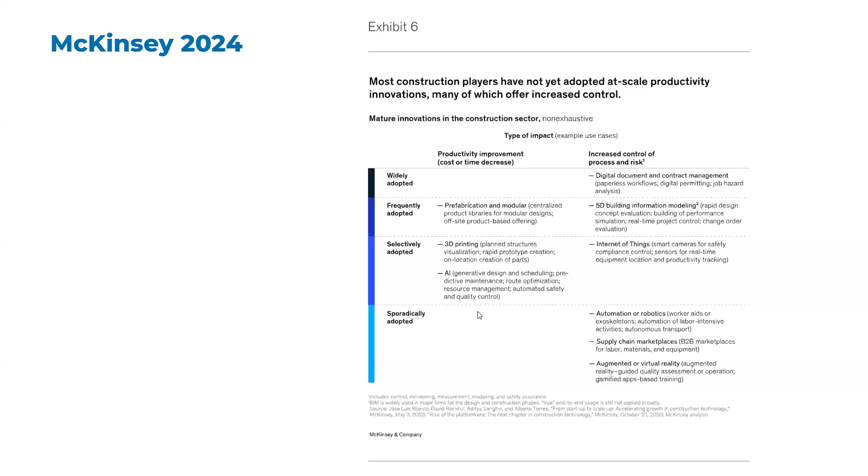And if we look at the current trajectory, construction output might fall short of demand by 40 trillion by 2040, according to the McKinsey 2024 report. These are the numbers. So we are all facing a great challenge: we must improve the way we work.

And if we're talking about labor productivity, construction continues to lag behind productivity in manufacturing and the total economy. So if we look at the 2017 metrics and graphs, we're still really behind. So we have manufacturing, we have total economy, and construction is still lagging behind.

And when I started this research, probably around 2019, so over 5 years ago, what I read about mostly at the beginning was modular construction. And I'm sure a lot of you are familiar with that. The team and myself were surprised that modular construction was not widely adopted and very popular. You can see in the picture a building by SHoP Architects in New York City, in Brooklyn. That's considered the tallest modular building.

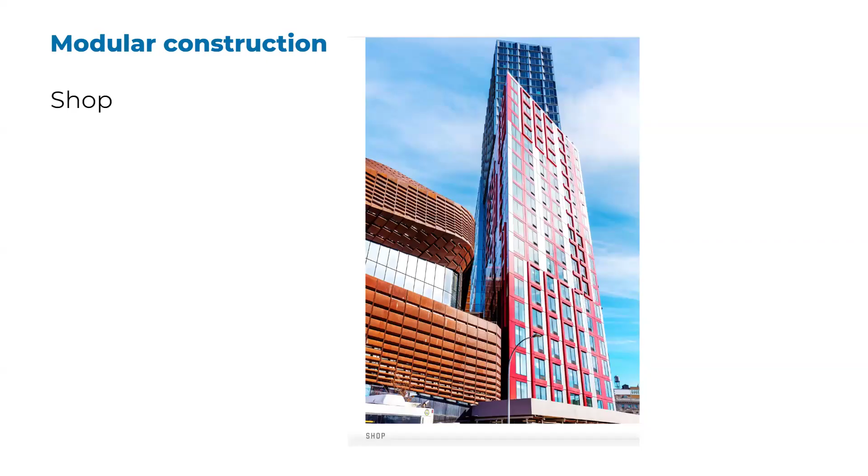And researching more deeply why it wasn't adopted back then in 2017, 2018, we found out that it's a great concept. It's a beautiful concept that you actually build everything, the units, if we're talking about multi-family projects or other types of buildings, everything is planned and built in the plant, and then brought ready-made to the construction site.

And the two reasons we believe it wasn't adopted all over the industry: first, the efficiency of urban buildings. Because these units are structurally self-sustained, the walls and the floors need to be structurally sustained, and therefore they're much thicker than regular buildings. So we lose a lot, it can be shorter floors or shorter buildings and smaller areas, and we lose a lot of air rights and spaces in the building.

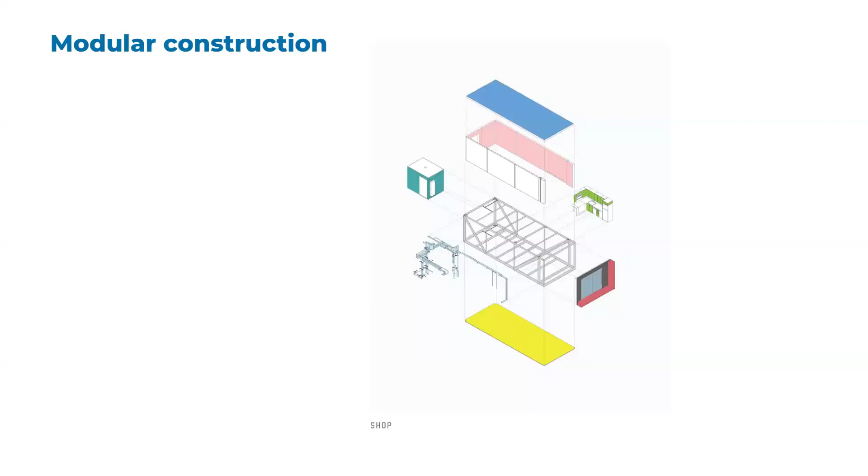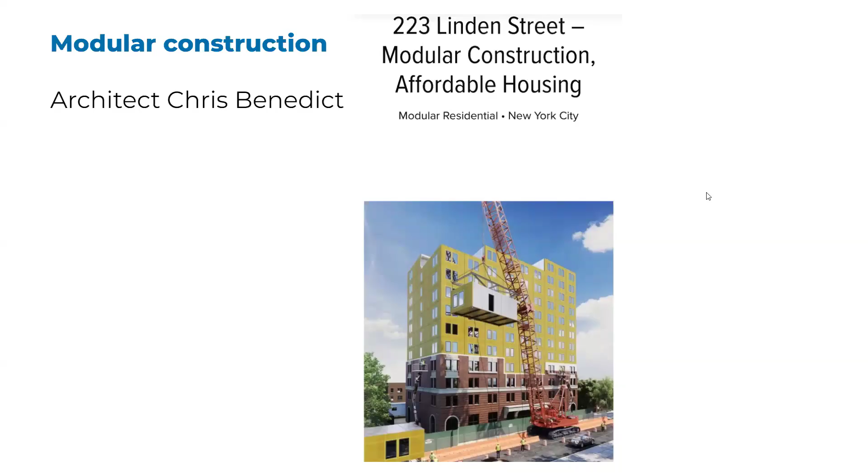The other reason we found out was that those buildings were not structurally well built. That was a major problem, since the safety of the occupants and the safety of the public was not maximized. That's another building, an affordable senior housing project in New York City on Linden Street in Brooklyn that was built with modular construction. And again, we found the same problems in the process of this building.

I'd also like to invite you to join me at the beginning of my career. I started my career at Florence University in Italy, and studying there involves a lot of Renaissance study. All my research as a student was about Renaissance masters and Renaissance architecture. One of the dissertations I focused on was Leon Battista Alberti and his theories of harmonic music. Renaissance men were not like today, where we're architects designing buildings or doing other trades that we specialize in.

Renaissance men were multidisciplinary people. They were architects, artists, historians, researchers, mathematicians. They really included all of these disciplines. For me, that's what enabled the creativity and the transformation of that era. A lot of the things happening today remind me of the Renaissance. So I'm going to go back and forth between my own past and our history of modern architecture, to see how we can learn from it for today's transformation of the industry.

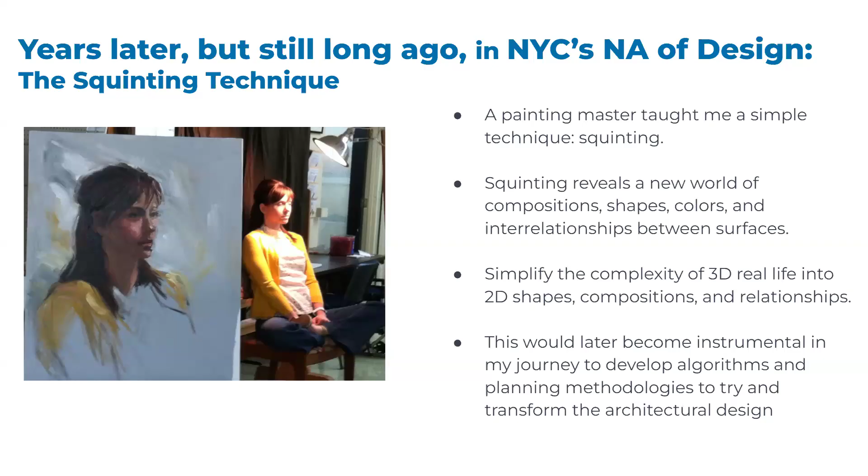And this technique of squinting would later become instrumental in my journey to develop algorithms and planning methodologies and try to transform the planning process. As you all know, the process of initial design of buildings is so complex, a complex constraint optimization problem, if we can define that problem. It's so multidimensional. We have the regulatory ordinances: we have building code, we have zoning, we have fire code, and we have ADA.

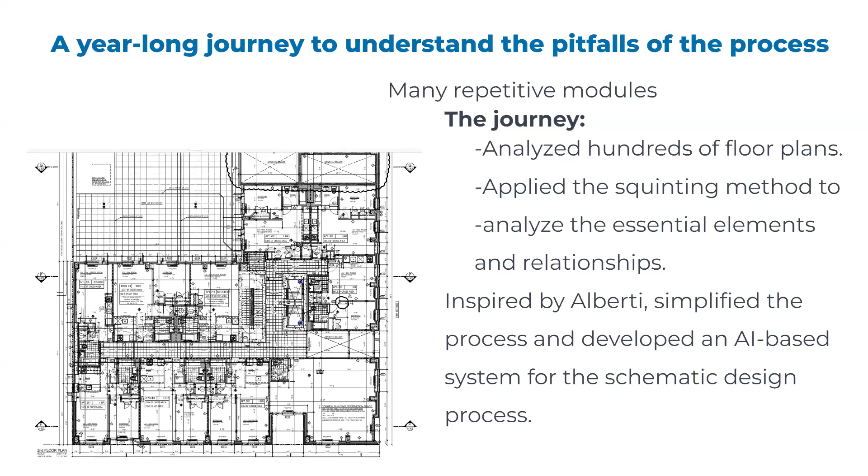So, Dity, we have a first question. They want to know, was the golden mean used by the Greeks included in the mathematical findings? That's not what Alberti's research did, but it's exactly the same principle, right? Because it's also translating visuals into regularities of numbers. So it's not what Alberti was talking about, but of course he was influenced. It's a similar idea. Are there any other questions? No, that's all the questions right now.

Okay, thank you. So going now to 2024, in the time tunnel to 2024, I think all of you heard of the Nobel Prize for Hopfield and Hinton for their discovery.

So this is the physics Nobel Prize, but they got it because they are the ones who actually started the foundation for the current AI transformation, because they studied the human brain and how the neurons in the human brain are connected and working, and their theories and research about that created today's most common AI that we see spreading like fire everywhere. And it actually started with these two. So they just got the prize now.

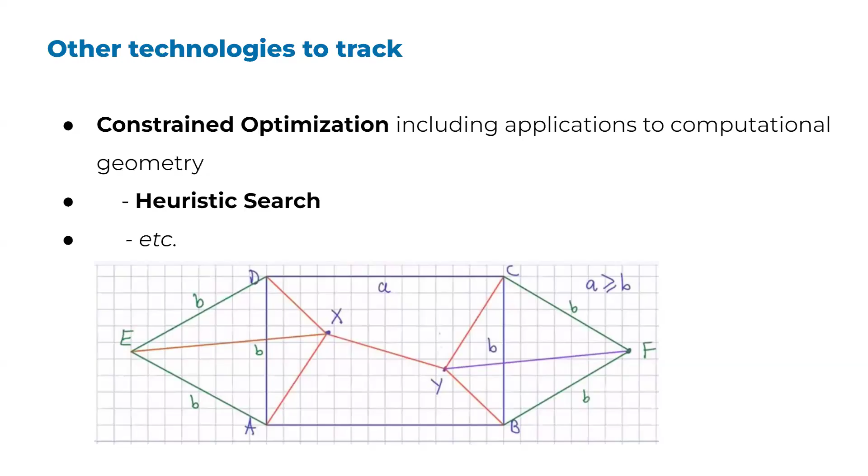And if we're talking about heuristic search, when we started to work, I had a meeting with two engineers, and they saw that our system automatically designed a building plan, and they were like, "How did you do that?" And one of the engineers, an older engineer, all of a sudden said, "I know." And he explained to his colleague, "If, and then, if, and then." So if, and then, like a decision tree that will create designs. At every step you can answer a question, and based on that, create your design.

So these open endless opportunities beyond schematic design or very conceptual planning. For example, code parsing, natural language systems analyzing complex building codes, zoning books, regulatory texts, and extracting the relevant information and constraints as input for the system. So that's not science fiction. We're already there.

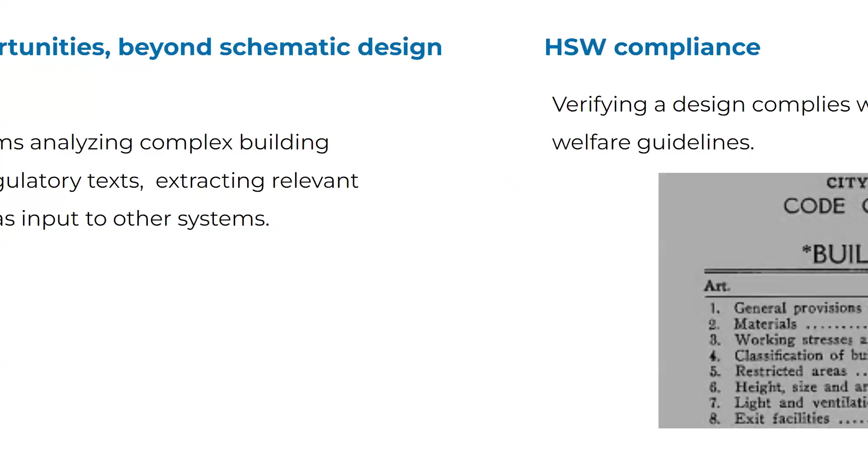So imagine that we teach a system what components like staircases, egress, and dwelling units are, and teach it all the if and then for every step of the design process, together with analyzing huge amounts of texts like building code and zoning, and how the system can come up with a design. If we talk about health, safety, and welfare compliance, verifying a design complies with those guidelines, it's the building code, and starting to teach those LLMs books like the building code.

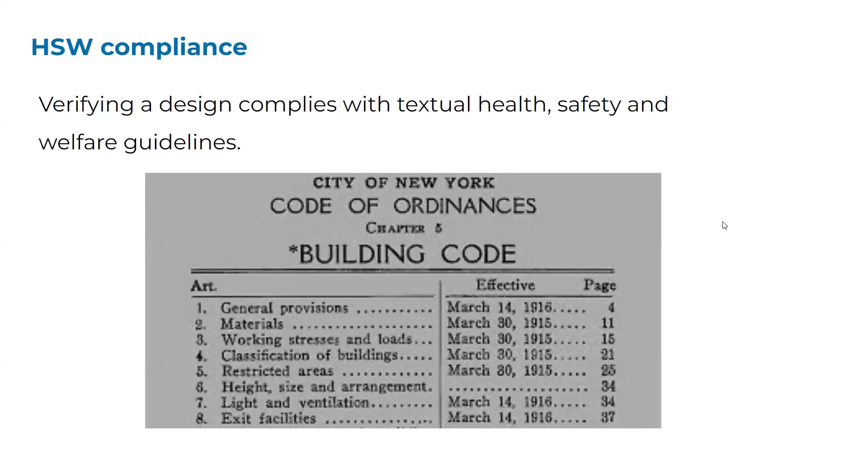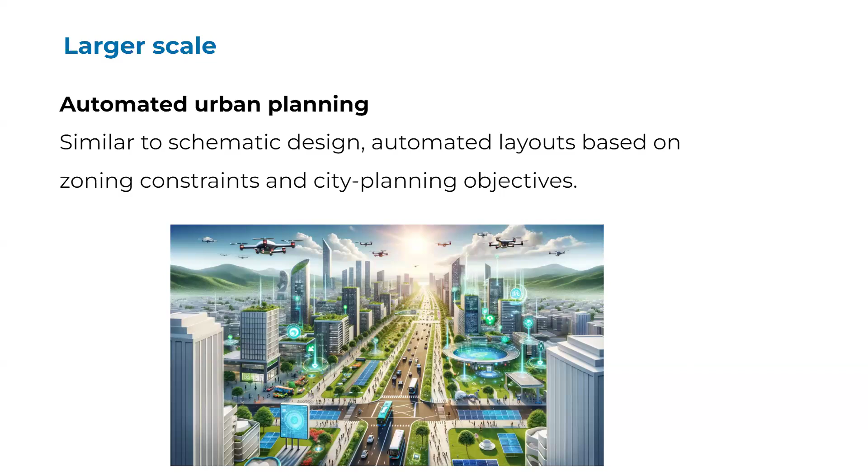And of course, you can take it on a small scale of a dwelling unit, or a small house, a building, a larger complex, and cities, if you're taking it to urban planning and large areas to plan. And ArcGPT, like chat interfaces for architects and for architecture. The sky is the limit for the possibilities in that.

Just to make it a bit more interesting, think about chess, the Leela and Stockfish chess games. Leela Chess Zero is only a neural network, the classical AI of the neural network that we spoke about. While Stockfish is rule-based, the if and then technology I described, but with huge computing power. And they're competing, and they built into Stockfish a layer of neural network on top of the classical algorithm. It's just an interesting analogy, but I think there are a lot of similarities between chess and architecture planning if we talk about technology.

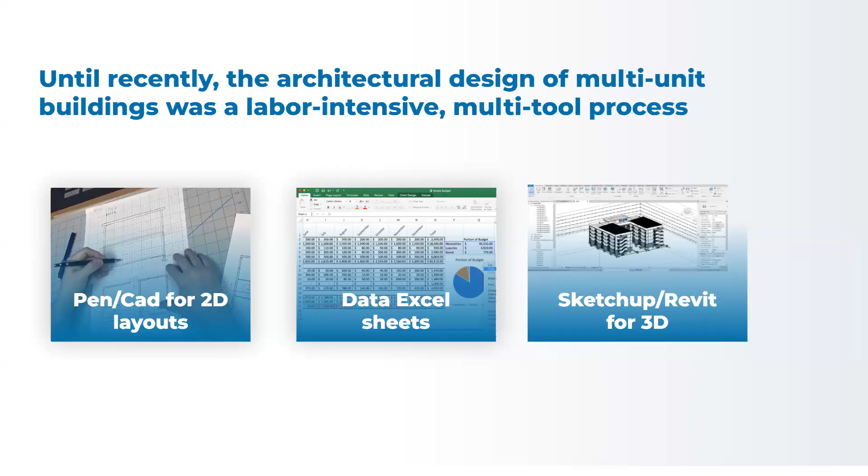So until recently, and even today, the architectural design of multi-unit buildings, meaning multi-family, mixed-use buildings, offices that have repetitive cells, hospitals, schools, and larger urban complexes, the way we plan is not very efficient. A lot of architects are still using pen and paper and CAD for the 2D, and then going to Excel sheets for the numbers. That takes a long time in the planning process of a project. And with SketchUp and Revit, you can have some 3D, but it's spread over a lot of different abilities.

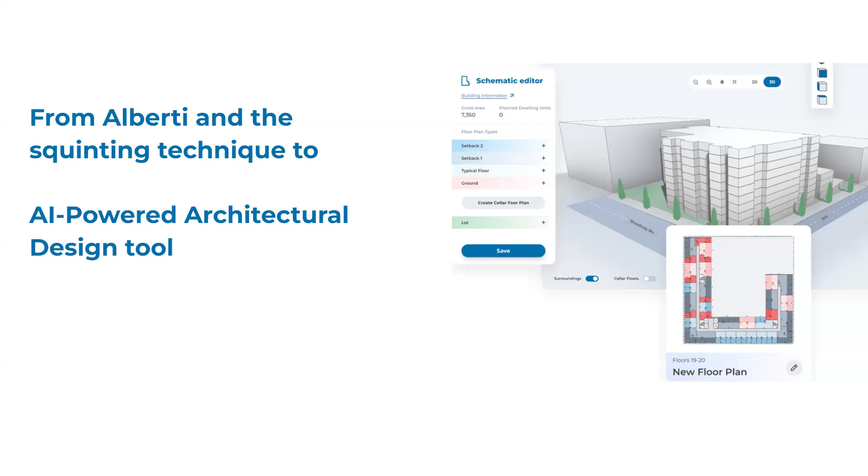All of the things that I described really helped us understand and dive better into AI-powered architectural design tools. And when we started, we were very concerned: will architects resist the intrusion of AI? So I was very happy to hear when Stacy started that there was demand to learn about AI. I'm not going to teach you about any specific tool, there are so many tools out there now. I think it's very important to strategically understand the ways to think about it and start to use it for any task you would like to improve in your process.

Surprisingly, we thought that architects would hate it and be very defensive, fearful for their jobs. But when we started to launch the product and talk to fellow architects, we slowly started to understand that architects are embracing it. The architecture process is so complex, so long, so many hours, with a lot of tasks within those hours that could be automated.

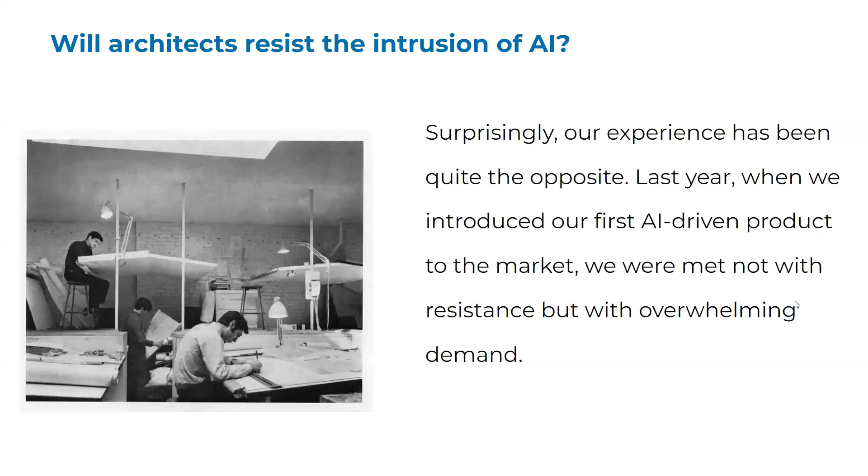So surprisingly, we met the opposite. We met real embracement from almost all of the architects we spoke to, embracing the opportunity to delegate repetitive and tedious tasks to AI systems, freeing time and energy for more creative work, and striving to make our small margin business, because architecture is a very small margin business, more profitable. That's very important.

Okay, I have a couple questions. Sure. Okay, as it relates to architectural design and AI, how does the if-then scenario play out when there are gray areas of the code or areas subject to multiple interpretations that need to be vetted, discussed, and confirmed with the agency having jurisdiction? That is a great question.

So in New York City, where I used to work, I don't have to tell you how complex the zoning is, and many times one section contradicts the other in the zoning resolution. So I totally understand the question, and I have some real life examples for it. But I think the one thing that AI can help with, when they work on large language models, is understanding those conflicts and making architects and planners aware of those conflicts. I don't think AI will solve them.

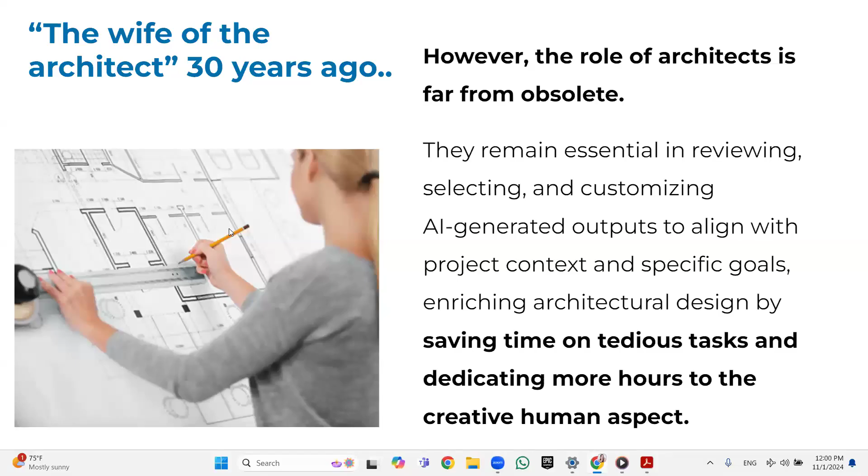And one time I asked her, Giulia, what does your mom do? What's your mom's profession? And I'm reminding you, it was 30 years ago. And Giulia responded, my mom is the wife of the architect. So the wife of the architect 30 years ago, does anyone have an idea what it was? Just in the chat, Stacy, if someone can guess. Okay, I see no guesses.

So 30 years ago, when I was in university, AutoCAD was not widespread. We didn't use AutoCAD. We used pens, and we drew with a special pen, and so Giulia replied to me, my mom is the wife of the architect. And when I was naive, like you, I didn't know what it was. I see people are starting to answer. So is there an answer, Stacy? Just a second here.

Yeah, there's assistant architects, tracers, draftsmen, drafter. Yeah, great. That's correct. So I didn't know what the wife of the architect was, I'm not coming from an architect family. And then Giulia explained to me that because we were drawing with pens, the wives of the architects were the masters of drawing these millions of dots to draw grass and millions of lines to draw the leaves of trees on floor plans and construction plans. And they were the ones that drew the million lines to make the stone facade on drawings, because it was all manual.

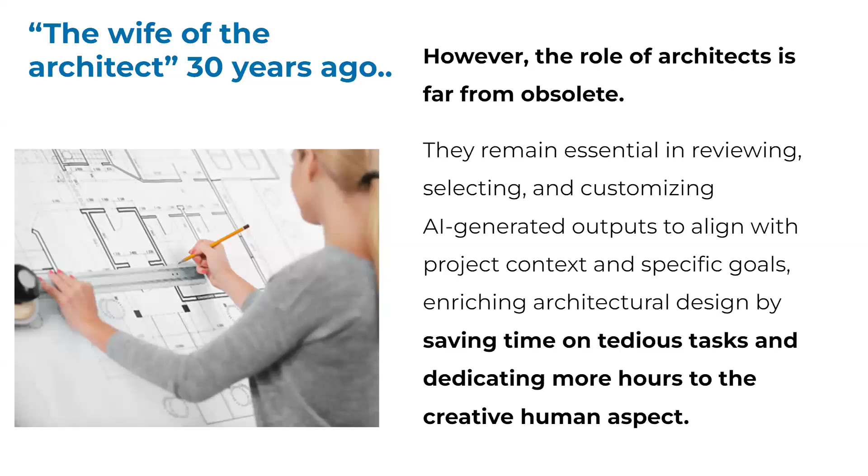So if we're talking about the role of architects, architects are still going to design the buildings and are still going to manage that process, but we'll need to change the skills. We remain essential in reviewing, in selecting, in customizing AI-generated outputs to align with project context and specific goals. But a lot of things are going to change. So that's actually the transformation.

We already see a lot of tasks being changed. AI tools like ChatGPT and generative design platforms are transforming a lot of the flows already. And we leverage AI for a lot of our administration. And like I said, I'm hoping it will boost creativity and productivity by handling the routine, boring, tedious processes. I was talking about the initial design stage, but it can predict materials, it can update BIM, assess clashes in the design of the system, and manage drafting and scheduling.

But while offering new opportunities, AI also raises questions about automation in architecture. And so, like I said, there's a lot of advantages. It's instant. We can do stuff up to code once it improves, and optimize multiple options. It takes us forever to design one option, but a system can do millions of options on the spot. And the workflow can also be connected to other means.

But we also have to talk about other aspects. Now, I spoke about Fariba before. This is a project that Fariba created in New York City, and all the use cases I'm going to show you are from New York. She's, in 2022, the 7th largest in New York. She's the owner of Fischer Makooi Architects. And if you look at her floor plans, you can see issues like egress distances. You can see stairs. You can see clearances. You can see dwelling units, that all of the dwelling units have access to legal light and air.

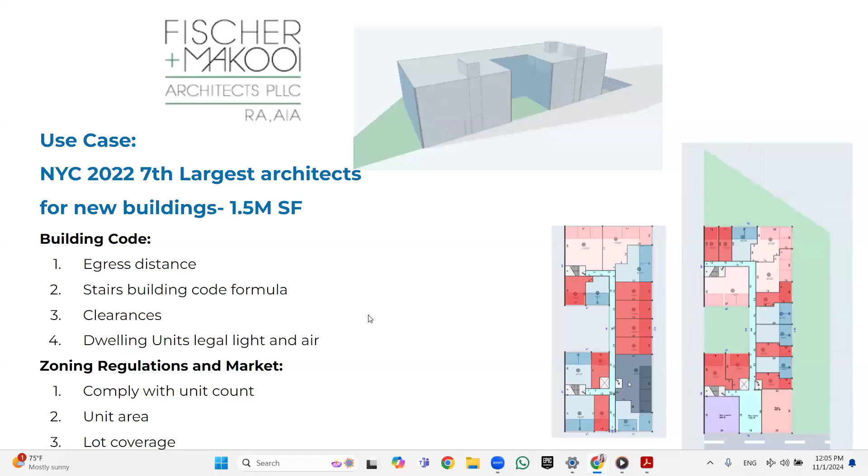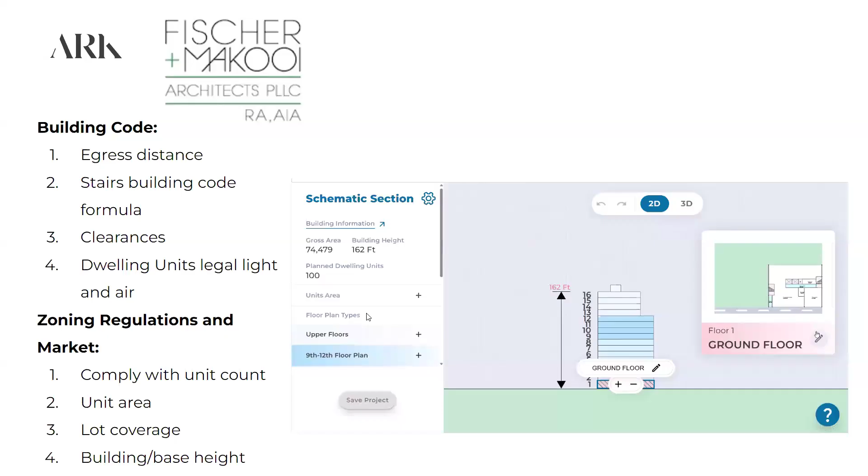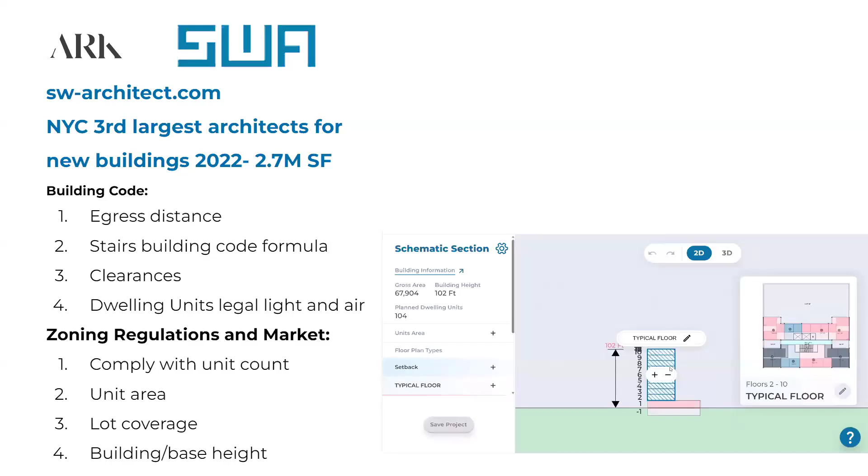In this floor plan. And if we're talking about zoning, compliance with unit counts, with unit area, with lot coverage, with base height, with so many aspects of building code and zoning. And so this is a project by Sam Weider Architects. He's the 3rd largest in New York City for 2022. And this is also a project that was created with AI. And again, building code, egress, stairs, clearances, zoning, comply with unit count, unit area, lot coverage, building and setbacks, and all those issues.

And so enhancing architectural design through AI, prioritizing health, safety, and welfare. So I showed you the examples that are real projects that were designed with AI, and we're hoping that it will increase or enhance the occupant well-being, the public well-being, streamline design for better health, safety, and welfare, and redefine traditional approaches to prioritize these outcomes. And it's not only about time and labor saving, it's also about better space utilization, because computers are better than humans in optimization. So I spoke before about mathematics and optimization problems like design of urban buildings, and computers have much better capabilities than us for optimization.

And if we talk about space efficiencies, it's critical for us. Housing is a basic human need, and rapid urbanization is happening. We need to build 96,000 new homes every day to house the estimated 3 billion people who will need adequate housing by 2030, which is almost now. Now, by 2025, 1.6 billion people are expected to be affected by the global housing shortage. And there's a lot of talk about the housing crisis in the US right now. The United States alone is short of 1.5 million homes today. And demand and efforts to develop sustainable, inclusive, and affordable housing solutions to cater to diverse needs of communities across the world.

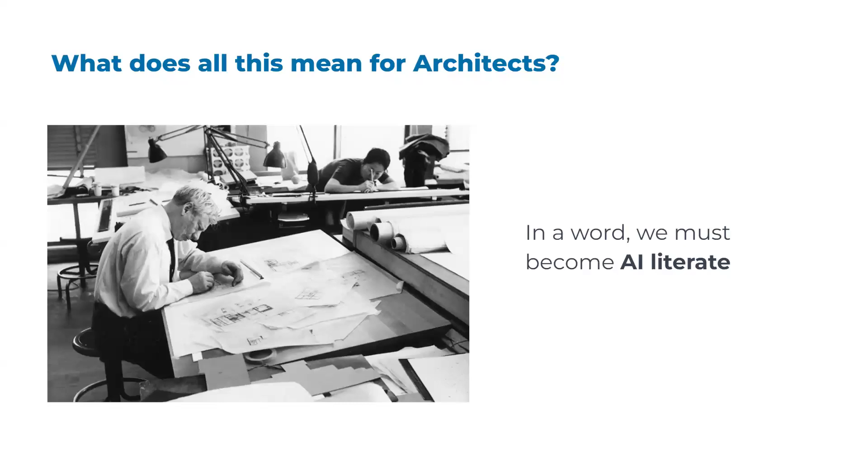In a word, we must become AI literate. Navigating complex building code regulations, for example, egress compliance. That's just one example I'll talk about because it's very easy to demonstrate in floor plans. It's a process where we have to make sure that all the exits comply with the egress requirements. For a machine, it's doable. It's very easy for a machine to learn those regulations and either speed a design that is complying or look at your design and help you make sure it's complying.

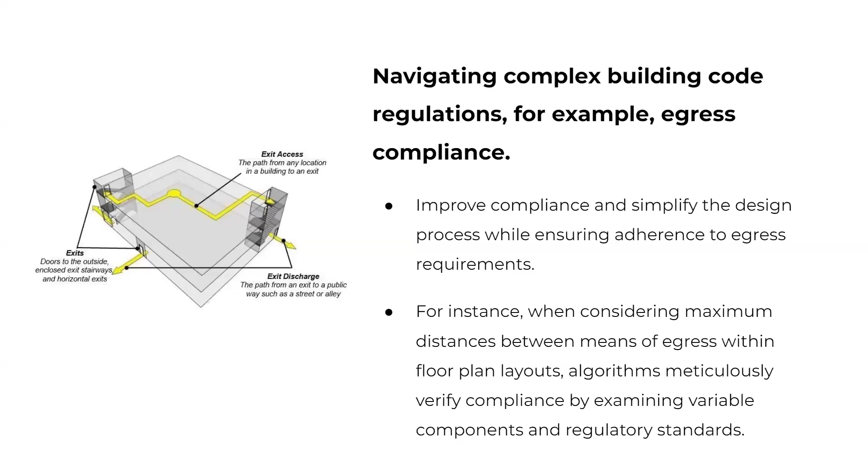So when we're considering maximum distances between means of egress in floor plan layouts, that's easy for algorithms to verify compliance for your plans. For example, safety during emergencies in egress, you can check that. And algorithms, as we had the question before, Stacey, adapt to diverse jurisdictional standards. I'll give you examples that I saw.

In New York City, the maximum allowed dead-end corridor, I can show you on plans later, is 80 feet. In California, I was told it's 50 feet. So that's something that is very easy for a system to learn, detect, and help you understand if your very complex design is complying.

Now, AI can play a crucial role in optimizing staircases. For example, the formula of tread and riser, the railing, the path, clearances, all that is easy for AI to speed a design that is complying or to verify that your floor plan is actually in compliance.

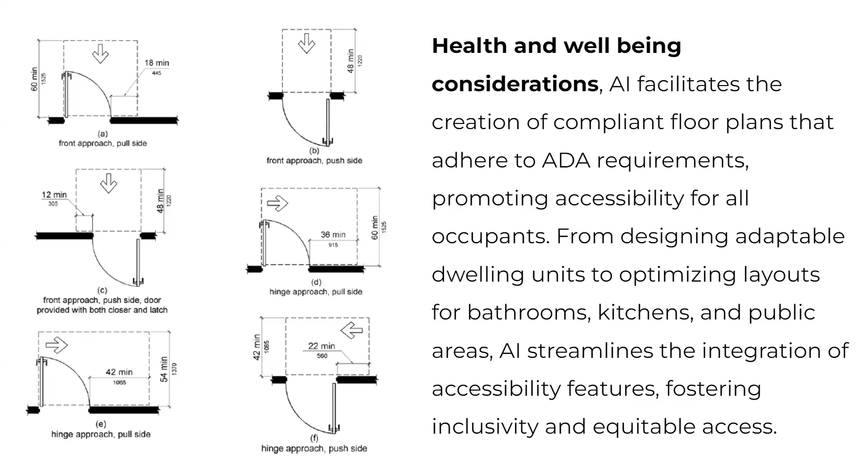If we talk about health, safety, and well-being considerations, we spoke before about safety and egress, but with ADA and clearances, we need to know that the wheelchair radius will comply in the floor plan of the dwelling units or any other building type we're designing. Algorithms can take all that complexity and produce designs that comply, making sure the wheelchair path and clearance radius all comply.

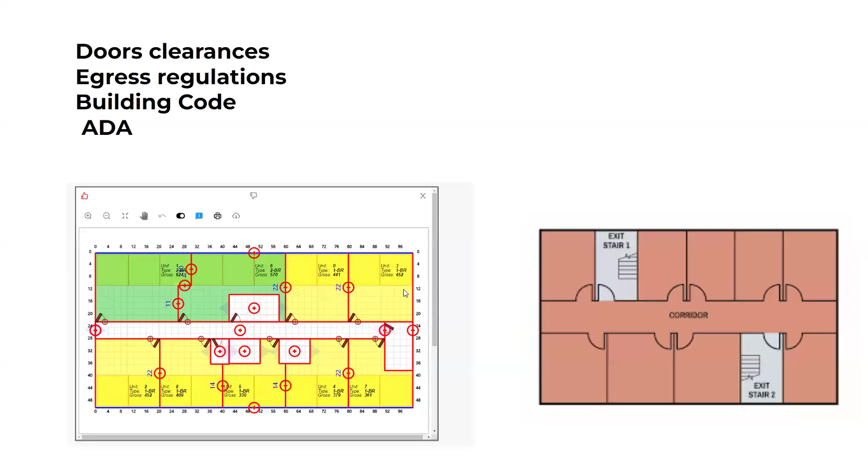And that's just a picture of our system when we started: we checked the dwelling units and the entrance clearances to every dwelling unit. So we talk about egress, but ADA, building code, and a lot of things, layers over layers, that systems can help us with.

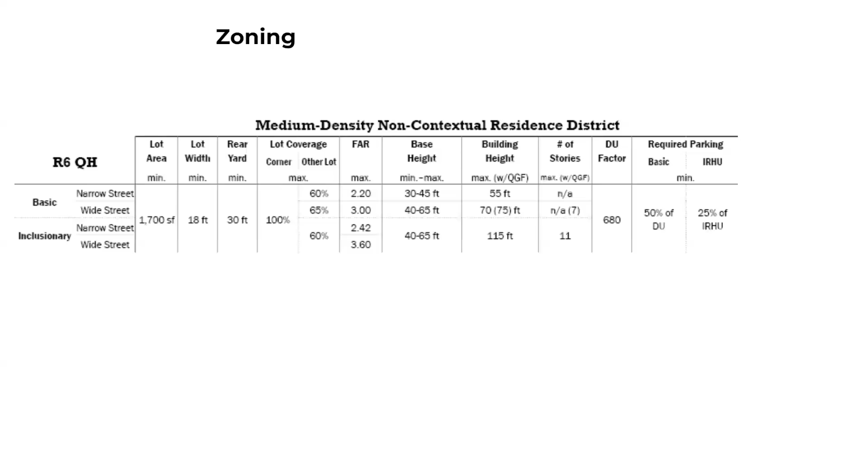This is a building in New York, the zoning in New York City for example. We have the lot area, the lot width, the rear yard regulations, the lot coverage, the floor area, the base height, building height, the number of stories allowed, the dwelling unit factor, how many units we can create on a property, how much parking is required. All those are numbers, very easy for an AI system to help you with.

So in New York City, we have quality housing, which is contextual zoning, and we have the height factor buildings. And many times, developers and architects are debating which is better for a property, for which system it's better to develop that property, height factor or contextual building.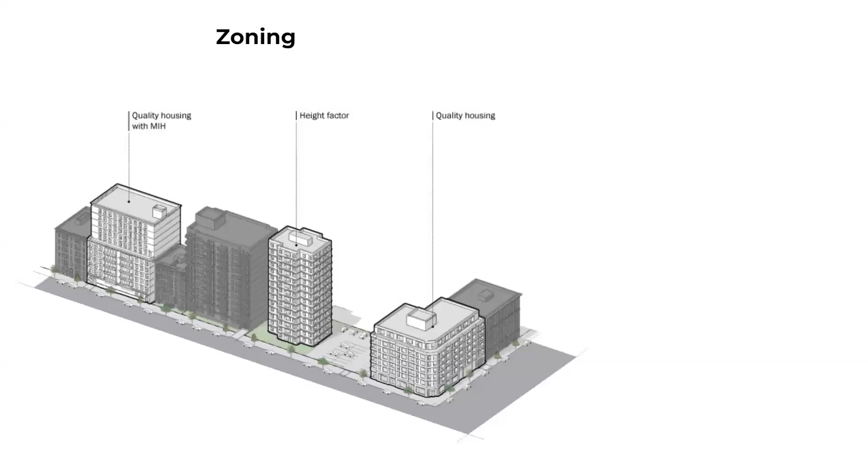And so AI systems can spit designs very easily and can really help you with those metrics. You need to know what you can do with a height factor building within the regulations and the zoning that we spoke about, or quality housing. And that's something that can really help at the beginning of the process.

Now, for example, if we're talking about enhancing architectural design through AI and health, safety, and welfare prioritization. So, for example, you have rear yard distance should be 30 feet. So a system can place a building with a 30 feet distance from a rear lot line. If we speak about lot coverage, how much of a lot you can cover for your residential portion, that's easy for a system to automatically make.

Street wall. So in New York zoning, you have to build on a street wall in order to preserve the street wall for contextual buildings. And so it's easy for a system to understand if you need to align to the street wall, if you need to align to the adjacent building, and all those conditions.

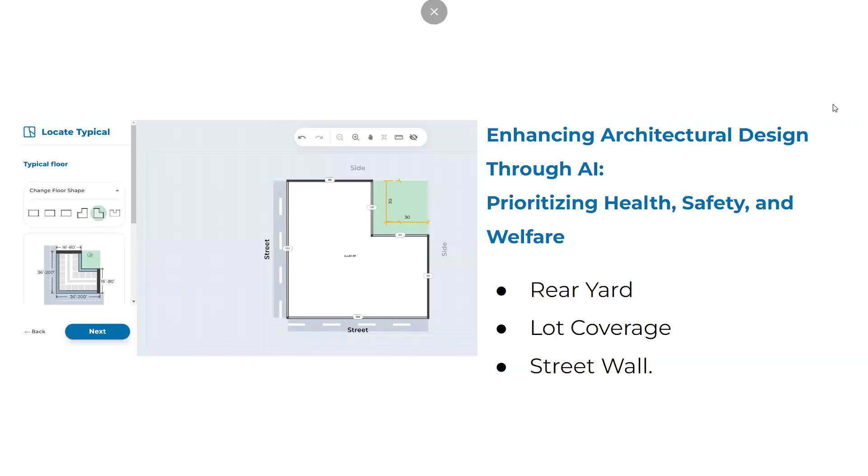A system can spit a lot of vertical core design options. So we spoke about egress and distances and building code. If we're placing an elevator in a building, it's not so much about building code, because elevators are not legal means of egress, but you need to know that the building occupants, the people that live in this building or work in that building, don't have to walk for an hour to get to an elevator, right? So there are also things where the system can help us with the well-being of the public.

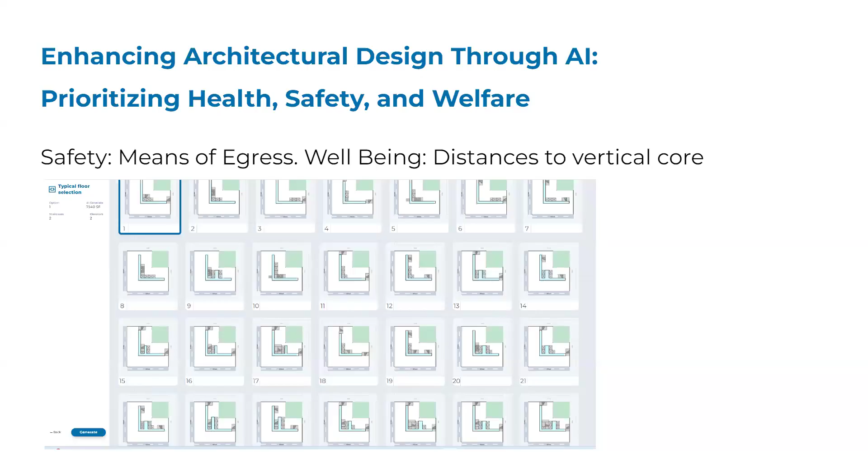And if we speak about legal light and air, for example, there are requirements for legal rooms, and those legal rooms in dense urban areas need to comply with legal light and air, so the legal windows can be placed on different facades of the building. And those facades can be either the street wall or a legal backyard or rear yard complying with the metrics from the zoning. And so a system can understand, or you as a user can input, which walls are window walls that will provide legal light and air to your building.

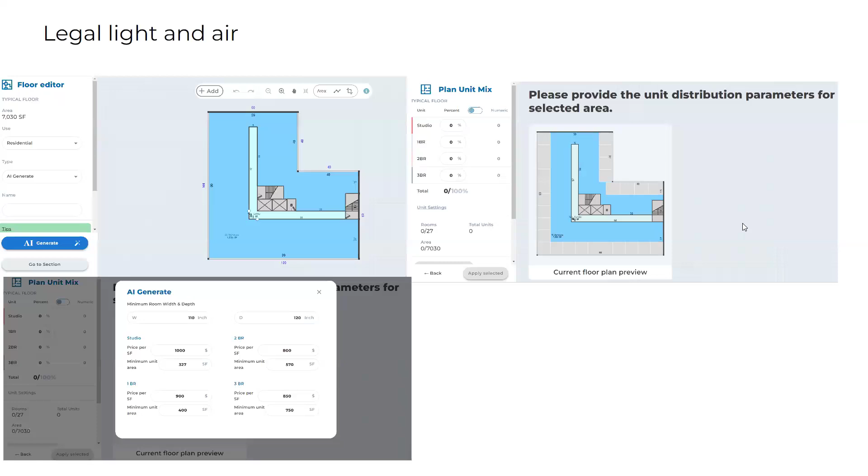And the system can automatically place the legal rooms along those walls, and can also place the dwelling units accordingly. And so if we talk about AI, I'll give you a use case just for you to understand in more detail how the process is happening. So if we're designing a typical floor plan, let's say of a multi-family building, the area of the dwelling units must be, like I showed you before, connected to a window wall.

Every unit designed in that area must have legal rooms, and those legal rooms must comply with the light and air requirements. Every dwelling unit must be connected to a corridor with the clearances that we spoke about before. So when you go into the unit, certain clearances and distances must be met. And so the AI will not work if those units cannot be connected in a legal way to a corridor or a lobby or a legal means of egress.

And another condition, for example, that must be met is, well, I lost it, all right? Okay, if the vertical cores could be,

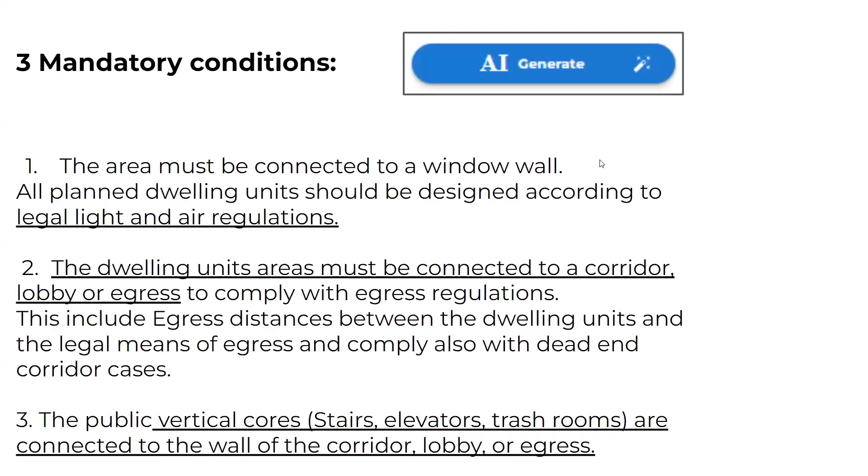Okay, yeah. And the third condition is if the public vertical cores, the stairs and the elevators, are connected to this public access corridor. So everything must comply in terms of building code, egress, and ADA, and it's all things that could be designed by systems. And those are use cases that I can show you.

So this is a multi-family building on Bedford Avenue in New York City. And that's, by the way, we played with the AI for rendering, so you can see renderings, but it's not connected to the health, safety, and welfare, so I will not show you examples. But that's another way of helping yourself: just getting really fast sketches of the massing that you want to show the clients, get it through one of the AI systems for renderings, and then show some different styles to your client.

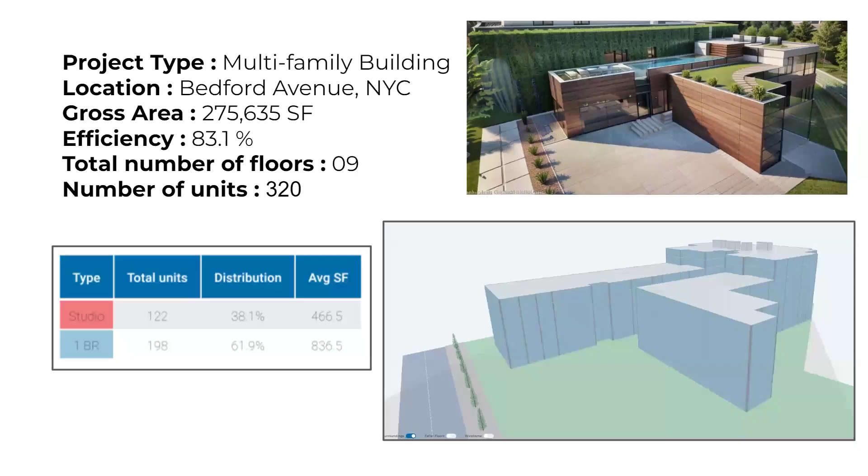So this is a 9-story building with 320 units in New York. And you can see setbacks is something that can be utilized or assisted by AI, where we need to do the setback to a building, how we're going to do it, and so on. Or if you have the sky exposure plane in height factor buildings, that you know the angle that you need to do.

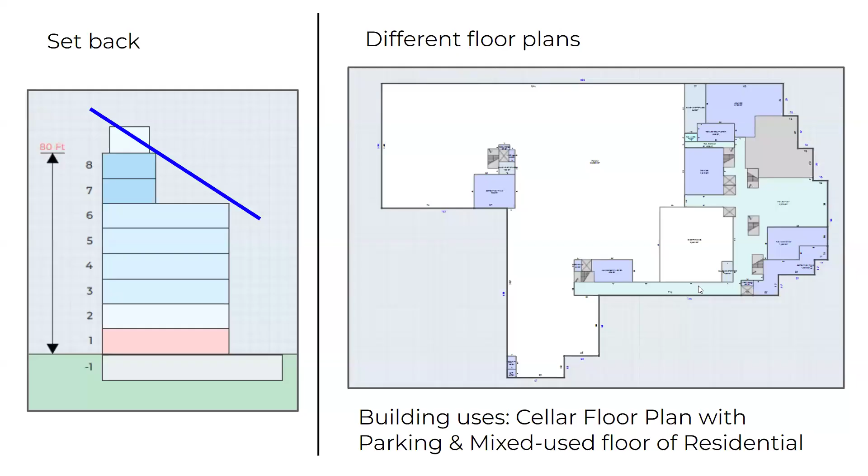And if we're talking about the different uses of a building, you are allowed to build different uses, and systems can verify that and make sure that all the uses are according to the legalities. And so those are floor plans of the building, and this is the first floor, and the system can see if all the staircases that are coming from the residential portion of the building are complying with the egress requirements. And if we're looking on this floor, you can see that we have some lobby here, and you have to make sure that everything complies.

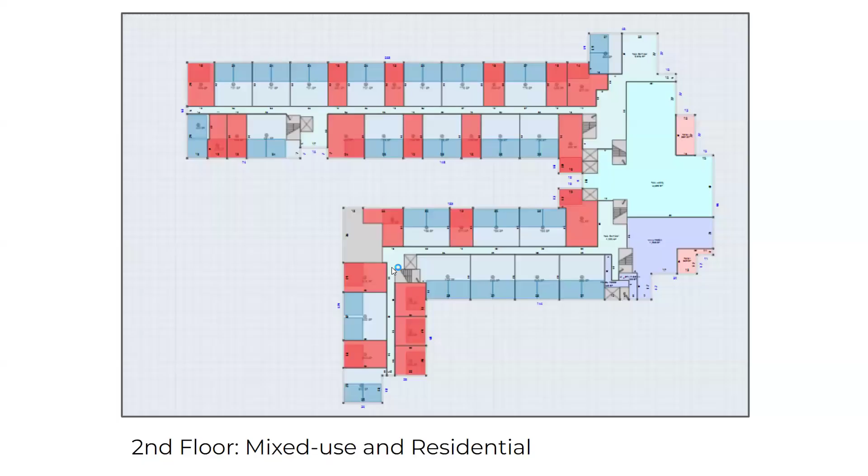So all the dwelling units have legal light and air, are planned along walls that provide legal light and air, and have access to a corridor. And we spoke before about the dead-end corridor distances, so it's not over 80 feet. And the distances to elevators are not more than a certain distance, as I said before, not because of building code, but more because of the well-being of the occupants.

Those are plans that were planned with AI. And like I said, we have conditions. The AI will not just spit something out. You must meet these conditions. So in this case, the area must be connected to window walls. And like I said, all the units must have access to legal rooms with legal light and air.

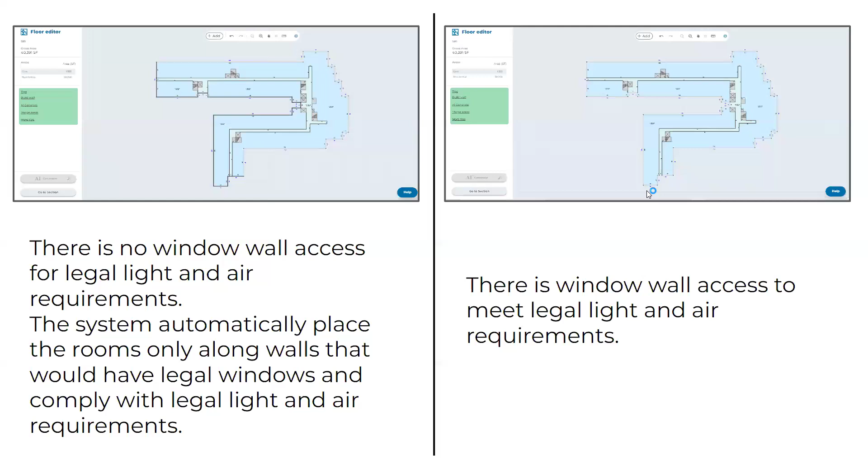And so if we ask the AI system to comply and design a building here, it will not work because it's a block wall. It's not a window wall. And then the AI will never work and will never design the dwelling units in this area. And if we changed it to window walls, the light walls, then it will work, like in this example.

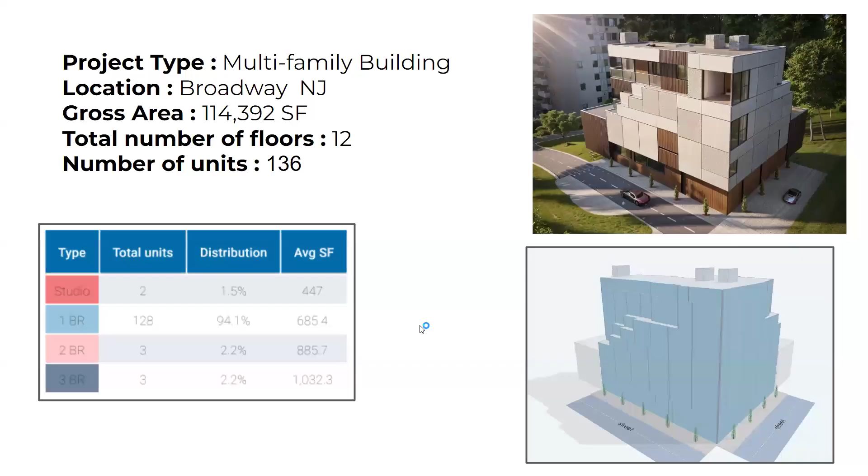So this is a building on Broadway, New Jersey, and it's a 12-story, 136 units. And as you see, the AI can calculate all your calculations, the distribution, the percentages of different unit types, studio, 1-bedroom, 2-bedroom, 3-bedroom, make sure that the areas of every dwelling unit are according to the regulations, but also to market standards. So a condominium building in one area will not be the same as a rental in other areas, and affordable housing in other projects.

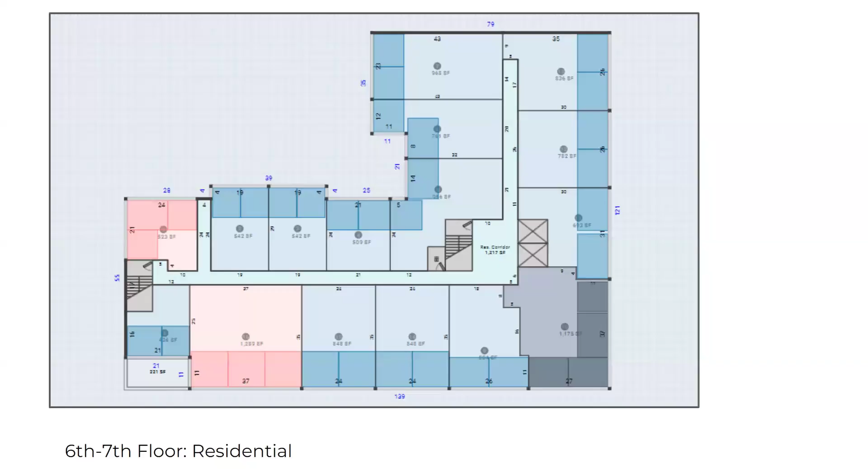So let's look at this project. That's the cellar plan of the project. It's a complex project, that's why I wanted to show it to you, with different uses, parking, residential. And the typical floor has dwelling units along the window walls, and you can see it doesn't place rooms along the block walls or the lot line walls, only along the legal light and air walls. And it can spit out different types of units for every floor type according to your input of market standards or zoning.

And if we're talking about another case study, the dwelling unit areas must be connected to a corridor, lobby, or egress to comply with egress regulations. It's not only egress, like I said, it's also ADA and other ordinances, but of course it must be connected to a corridor, it must have legal means of egress, and must comply with the dead-end corridors that we spoke about.

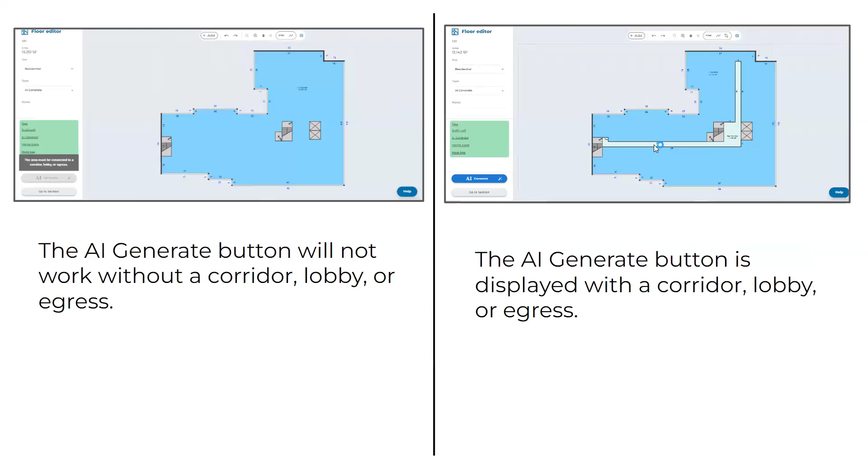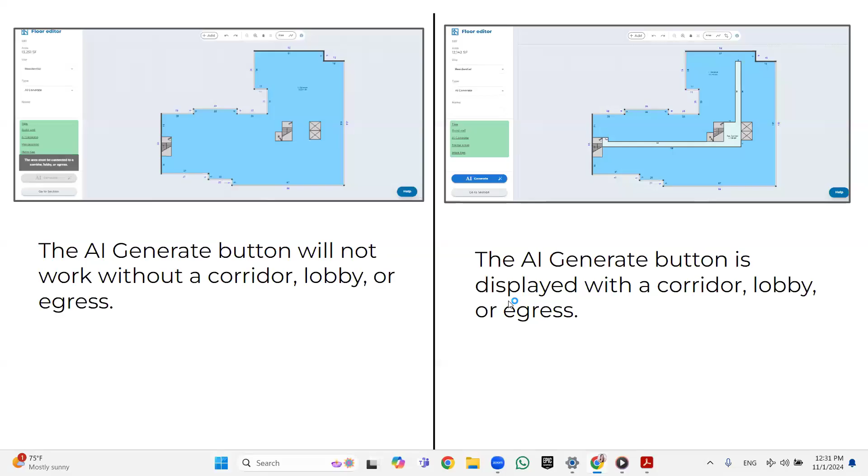And for example, if you ask the AI to generate this typical floor plan on the left, you see it's not working. Only when you give access to these potential plan units, in the example on the right, then the AI is turning blue and will work for you. The button will work and you can plan those units.

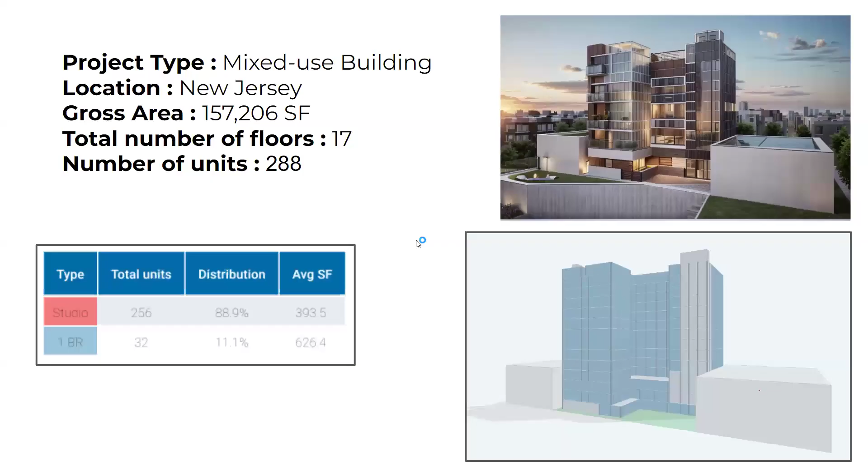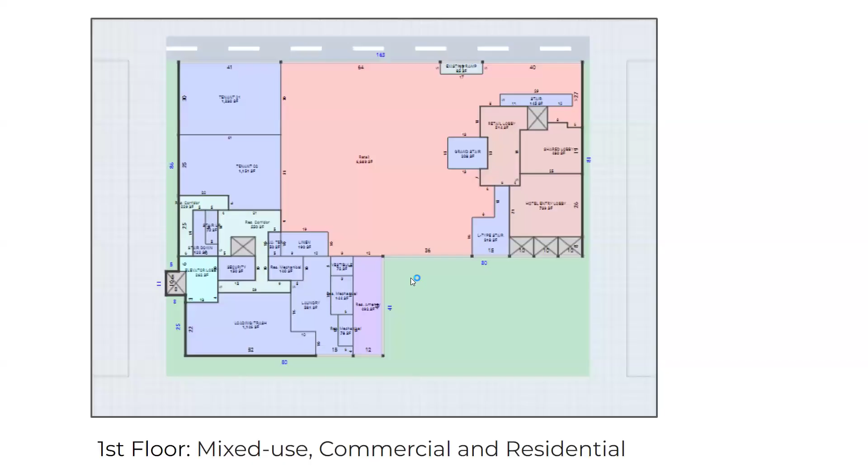That's another building, also in New Jersey. So not only New York, also New Jersey. And you can see that it has 288 units. It's a mixed-use building of 17 stories. And you can see that's the mixed-use floor. So we have also retail, and it's also designing mixed use into this building. And the egress is also on the first floor. You know that all the staircases and everything are complying like they should, with exits to the street.

And that's an example where shafts and vertical cores must be connected again to the corridor. So not only the dwelling units must be connected to corridors and comply with clearances, with egress, and all that, but also the vertical shafts, of course, the elevators, the staircases, and everything.

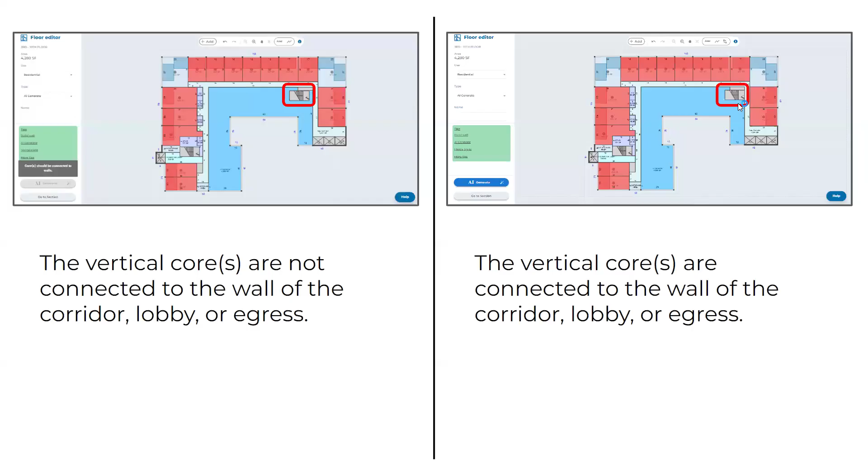So if my staircase, for example, with the door is not connected to the corridor in the right way, and I'm asking to design only this portion of the building with dwelling units, the system will just not work. Once I connect it the right way to the lobby, or to the egress, or in this case to the corridor, then the system will work and will design the dwelling units automatically.

Now, we spoke about building setbacks, for example. So we need to comply with the sky exposure plane. And of course, if we're talking about setbacks, again, in New York City, the areas that are built with really tall buildings have very little light in the streets. And so in order to make sure that we will have light to the streets, they created the sky exposure plane, but also the setback regulations in the quality housing buildings.

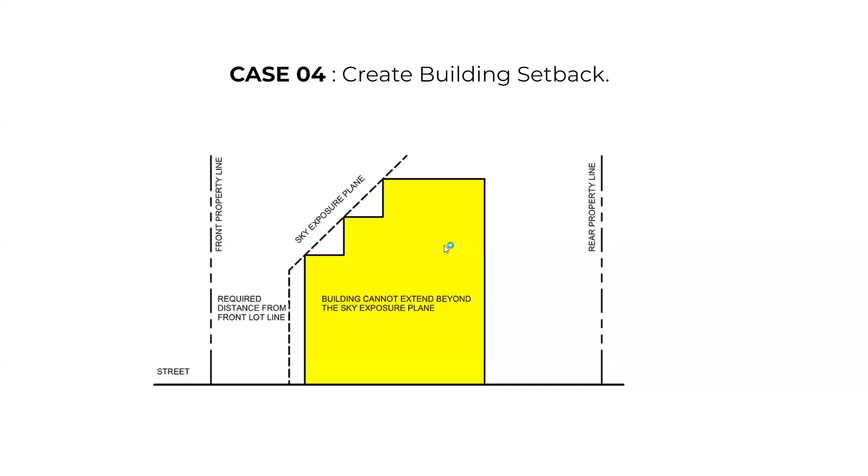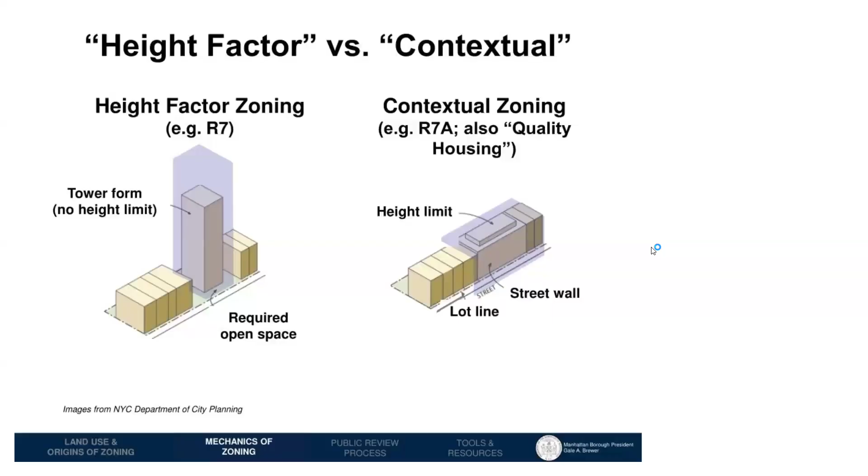And so it's all about geometry and metrics and numbers that are in the books as text. And so it's very easy for a system to interpret that and create complying outputs for those regulations. And so again, from New York City, the height factor, the contextual zoning with height limits, lot coverage for the contextual zoning, the height factor building, street wall that has to align to the adjacent building, and so on. And systems are already complying with that, and spitting designs that comply with that.

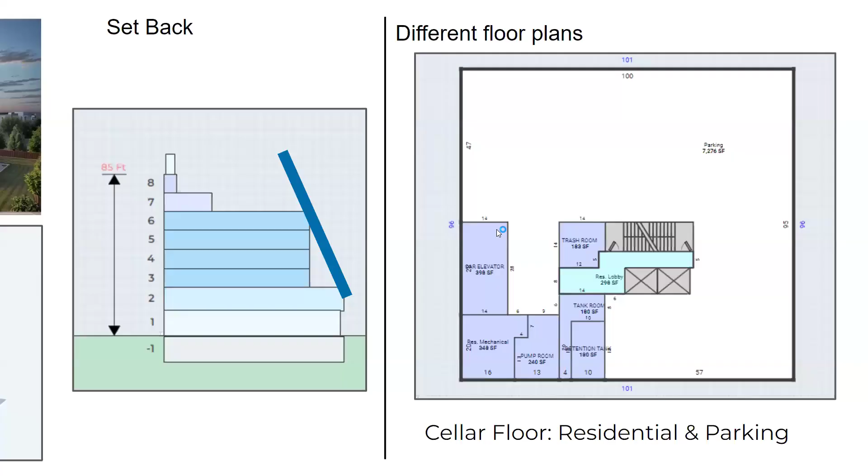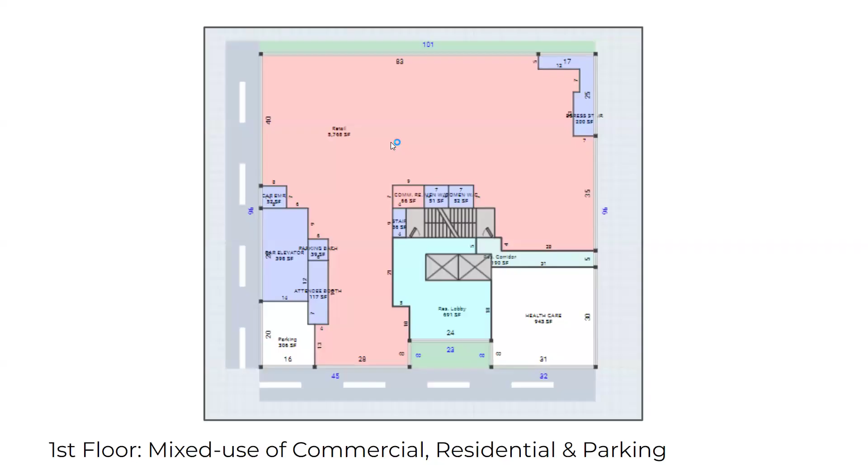So that's a building on 15th Street in New York City, 9 stories, 44 units, a smaller scale building. And we're complying with the contextual building with a setback that is required here, and the parking area that is required here, and it's a commercial mixed-use building, so we see the commercial area that also needs to comply with the floor area that is permitted for the commercial portion of the building, and has other regulations, including access, that is within the text, and so systems can already input and output those.

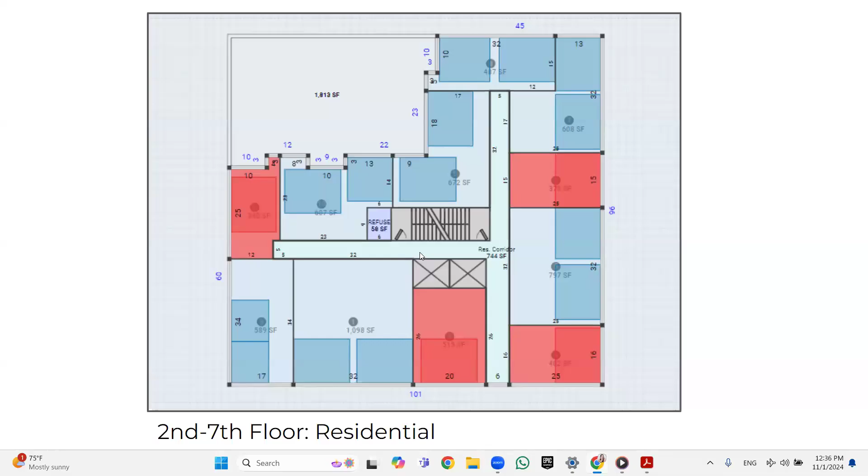And you can see here we have again the dead-end corridor, and a system can measure this distance, and we have the scissor stairs that are very common in New York City, that also need to be verified as complying with the building height, with the floor height, and so on, and systems can do it really well and save us a lot of work.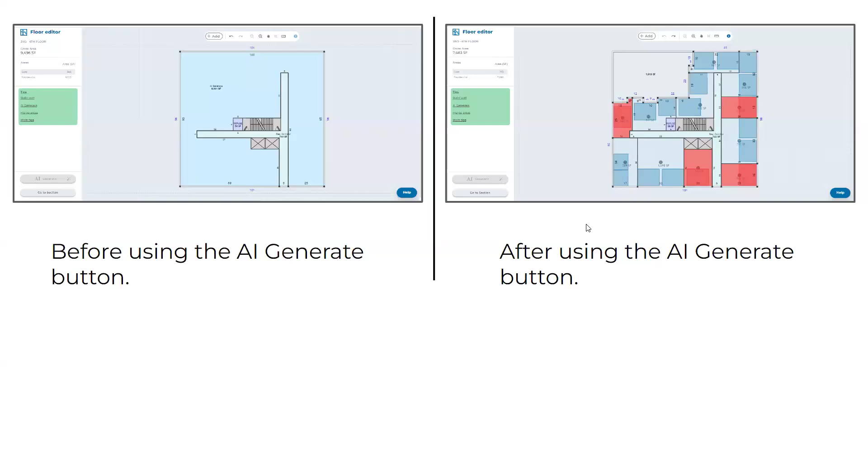So now, for example, before doing the AI generate, we explain the lot coverage, we give the system some information that we want, and then the system will spit out the setbacks, the courts, and the dwelling units layout for that building, and make all the calculations and make sure it's complying with your design.

So we're optimistic. It's corny, but it's true. The slogan that they say about doctors: AI will not replace architects, but architects who use AI will replace those who don't. So I'm really happy and thrilled that so many of you joined this talk. And I do think that it's crucial for us to start.

And like I said, I didn't give any name of platform, but it's very important for us to start learning in a strategic way. And that's why I spoke about the technology and the opportunities or the potential. Think of the tasks that you really need help with in your practices, and start to research and think about the technology that we spoke about. How can it help you? And I'm sure many of those tools can help you.

They can save you a lot of time, and maybe help with your work-life balance, and maybe make your practice more profitable and more fun. And so I really hope you guys will start to dive into that.

And I'm really thankful you joined. And like I said, that was an HSW, Health, Safety, and Welfare lecture, and that's why I tried to stick to that. But I think there's so much in that and more.